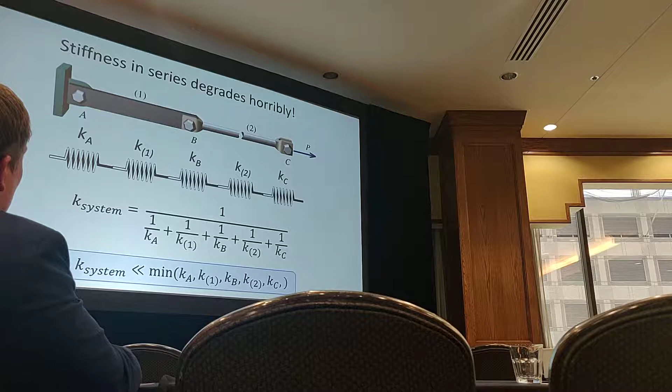You're not interested in two-bar linkages per se, but extrapolate that in your mind to a structural system. The easiest way to present it is with this little system. On the left, we've got a connection, a bar, a connection, a bar, and a connection. We're interested in knowing the total stiffness of that system, which could be represented as 5 springs in series. If you did the math, that's what you would calculate. But my point isn't the math, it's to really think about structural systems when they're in series, and realize that the system stiffness is actually smaller, a lot smaller, than the smallest of one of those individual stiffnesses. It really hurts when you put things in series.

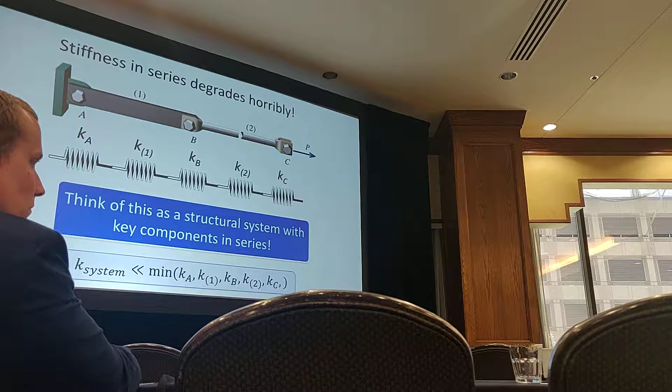Sometimes engineers will have a bracing setup that's all in series, and they've got a problem they can't fix, so they call me up and ask what did you do. Well, we had it all in series. What did you do next? We added one more member in series, but this was a really stiff member, and it even made the problem worse. So here's a situation where you add material and you're going in the wrong direction. As long as you're putting more and more in series, you're making the problem worse and worse.

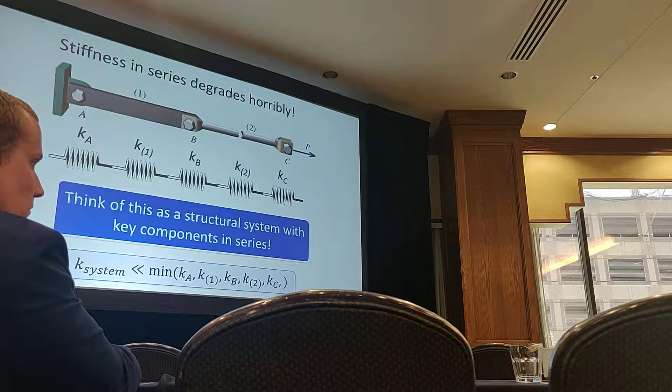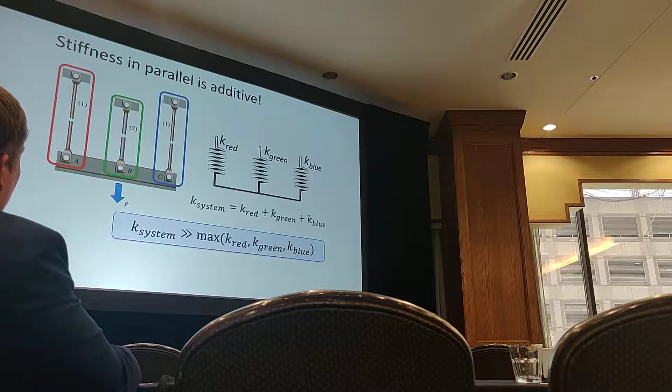Now the counter to that is when things are in parallel. This is a much better universe to live in. As a structural engineer, always ask yourself, especially in stability problems, am I helping the problem? Do I have my setup in parallel? Here are 3 springs now in parallel, 3 bars. Life is a lot better. In fact, the stiffness of this system is larger than the largest of any one of those, a lot larger. Anytime you add another component, you're adding more stiffness, so you're making the problem even better.

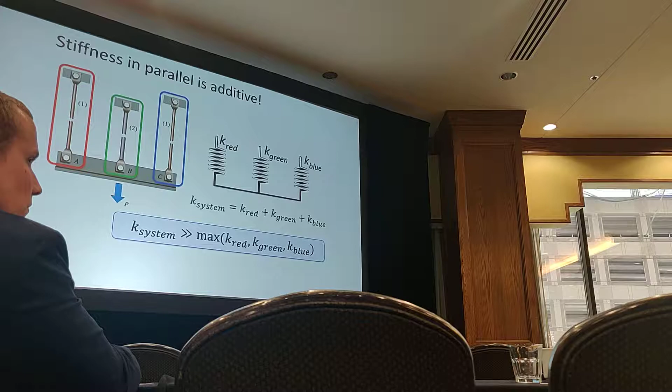So really focus on, do I have a problem here? And are they in series? And is there any way to switch from series to parallel?

The force always has a load path. When things are in series, if one of those springs is a piece of wet spaghetti, you've lost the stiffness of the entire system. But if you have things in parallel, if one goes soft, a connection starts to yield, there's an alternative load path, forces can redistribute. That's a really good thing to have on your side. So that's my first point.

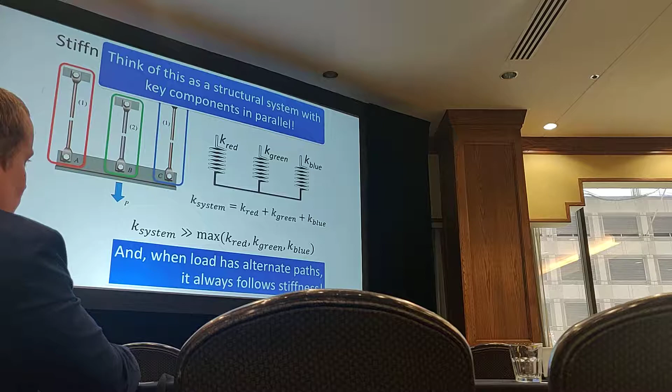The second is sort of the basis of every structural analysis. What you've got is equilibrium. So structural engineers, you're all cool with that, the forces and the moments, you've done that a million times.

The sister to that, which doesn't get a lot of attention, are compatibility equations. These are sort of the equivalent of equilibrium, but in terms of displacements and rotation. So if you have a column and a beam connected to it, if that beam rotates and it's a rigid connection, so does the column. These things all have to make sense.

Now, fortunately, between the two of those, we have enough equations to solve any problem. Unfortunately, some of the equations are in forces and moments, and the others are in displacements and rotations. So we have apples and oranges, and what allows you to move all to one side or the other are your constitutive equations, your Hooke's law and all of that.

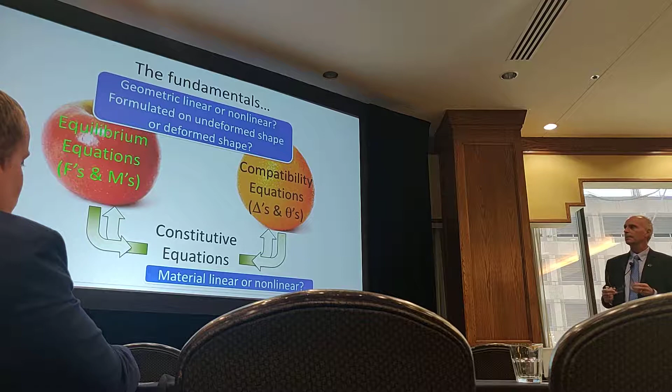So why do I bring that up? Well, a lot of you are using structural analysis software that can do a geometric nonlinear second order P-delta analysis. The only way it does that is by modifying either your equilibrium or your compatibility equations. If they're being formulated, equilibrium and compatibility on the undeformed shape, you are not accounting for second order effects. If they're accounted for on the deformed shape, you are.

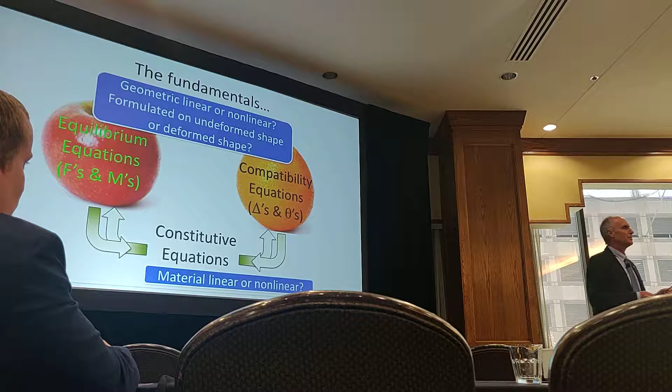This bottom part is if you go even further and do a material nonlinear analysis, accounting for yield and so forth. That can only be done through constitutive relationships. This is just a wake-up call on the fundamentals that often get missed - how does the program account for this? This is how it's doing it.

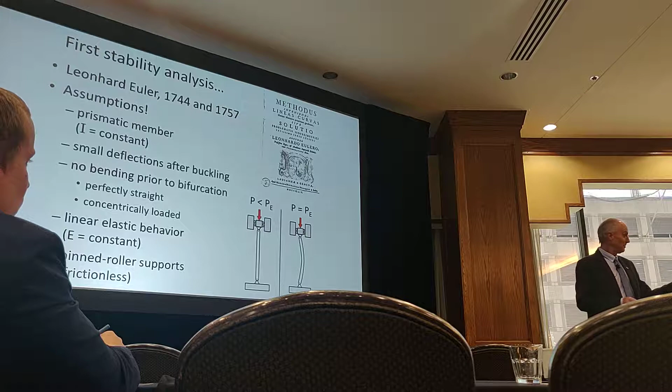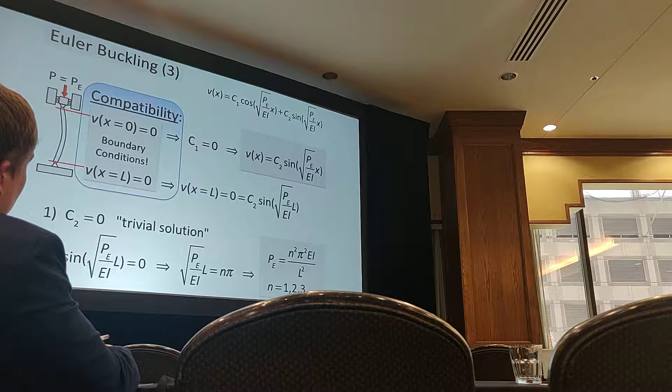Going back to the oldest stability analysis in the mid-1700s, Euler looked at this. I just want to show you his math: he started with equilibrium on the deformed shape, already doing second order analysis. He had a buckled shape, did equilibrium, and applied a moment-curvature relationship, which is a constitutive relationship. This provided a differential equation that's been solved many times. To actually get down to the familiar result, pi-squared EI over L-squared, he needed one more step: applying compatibility and looking at boundary conditions. So even the oldest stability analysis uses equilibrium, compatibility, and a constitutive relationship - those are your tools.

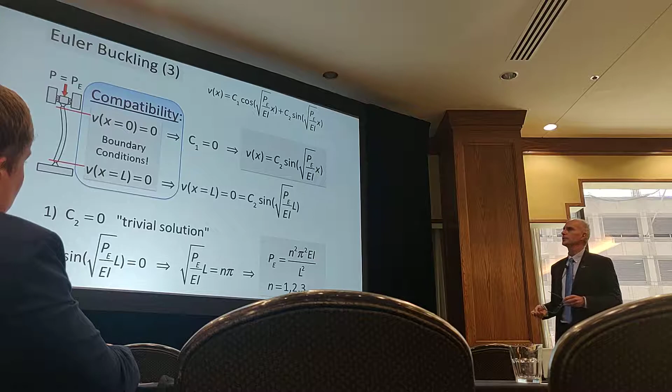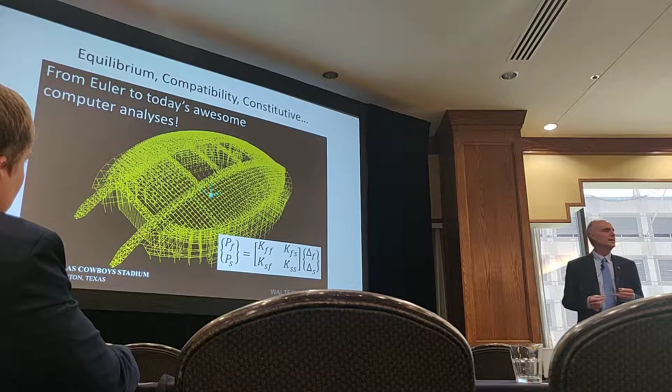If you look at today's structural analysis software - here's a SAP2000 model of the Dallas Cowboys Stadium, done by Walter P. Moore - underneath that software you'd find a lot of computer code and linear algebra. But keep digging and you will find equilibrium, compatibility, and that constitutive relationship. It all comes down to those basics.

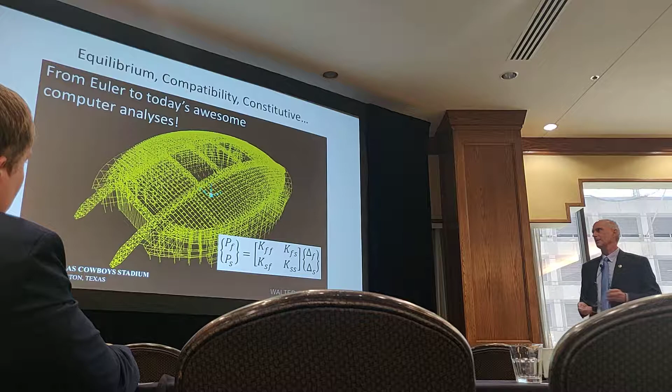Superposition is always so tempting, but keep in mind, in order to superimpose effects, the system has to be behaving in a linear fashion. Many times with respect to serviceability you do have that condition, so you can apply superposition. But many times when looking at ultimate strength, limit states design, and instability problems, you can't use superposition. So have that in mind.

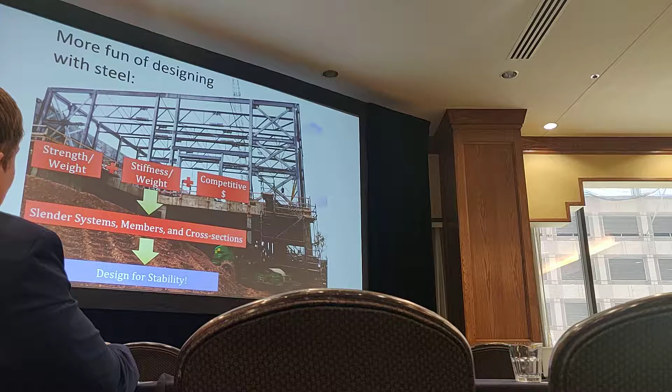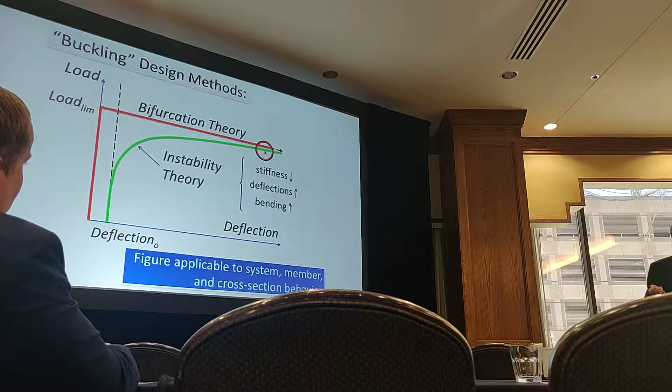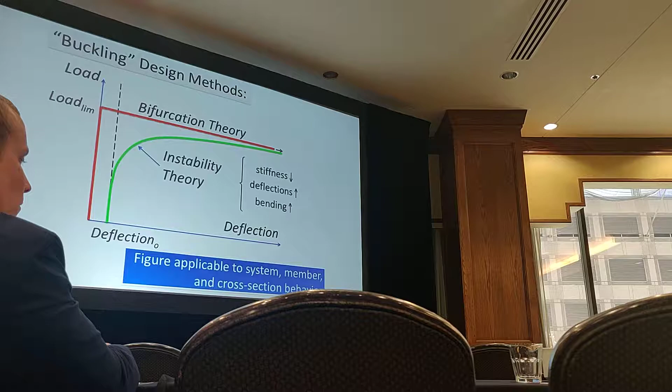This is pretty much what all of us came through whenever you were educated, 60s, 70s, 80s, into the 90s. That was something was perfectly straight, nothing happened, and then suddenly, wham, it buckled. Those are the differential equations you solved in life. But when we transitioned more recently in a design method, we had to assume something was not perfectly straight. There was a small amount of imperfection, and as you loaded, that imperfection started to grow, and eventually you would reach an instability. So two different schools, and it's the instability theory one that people are still wrestling with today. So let's give that a try.

So here's a couple of different possibilities. Here's a compression member. Let's say, over on the right, we're testing this at Lehigh University, a big long structural steel column. We're squishing it, and we would have two schools. Now I've taken the structural member and rotated it on its side, but if on the horizontal axis we were monitoring lateral deflection of the column, on the vertical axis the applied load, bifurcation would tell us we come all the way up, we hit Euler buckling, elastic flexural buckling, and off we go.

On the other hand, if we had some type of initial imperfection, we would load this thing up, and if we didn't get any yielding, it would sort of track the green curve, where that initial imperfection would start to grow. When it grew, the moments would grow. The moments grow bigger, more force, bigger moments, bigger deflection, and eventually we'll buckle the column. Of course, in reality, those moments grow, and between the combination of axial force, flexion, and a little bit of residual stress, we actually get inelastic flexural buckling. So it happens with a column.

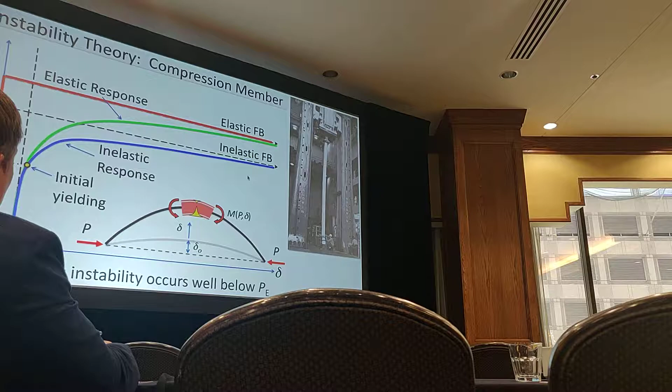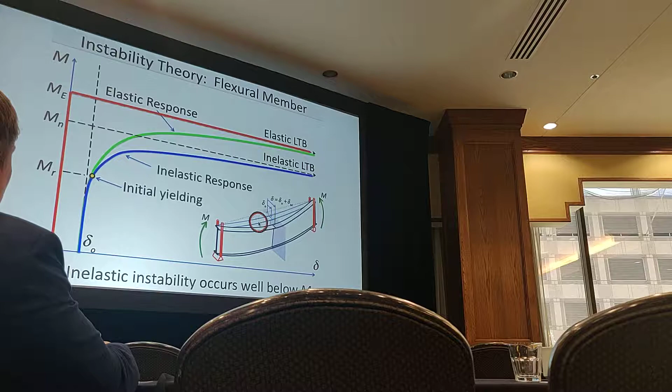Here's a flexural member being subject to uniform bending. What we're going to monitor here, it's unbraced for quite some distance. We're going to look at lateral torsional buckling. So here's this point here, and as we apply these moments, if the member is perfectly straight, moment, and then suddenly we've got elastic LTB.

If the member has any small, and they're real, initial imperfection out of plane, we get minor axis bending, not much, more moment, not much, and then suddenly out of plane, the moments start to grow. As we apply more major axis moment, we get more minor axis moment, more twist, some yielding, and eventually we get either elastic or inelastic lateral torsional buckling. Again, two schools, the bifurcation school and the instability school.

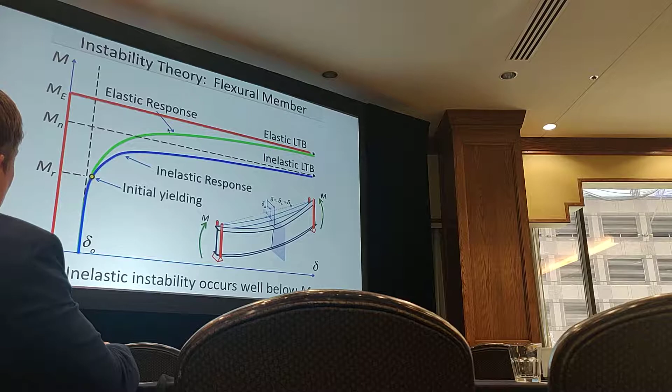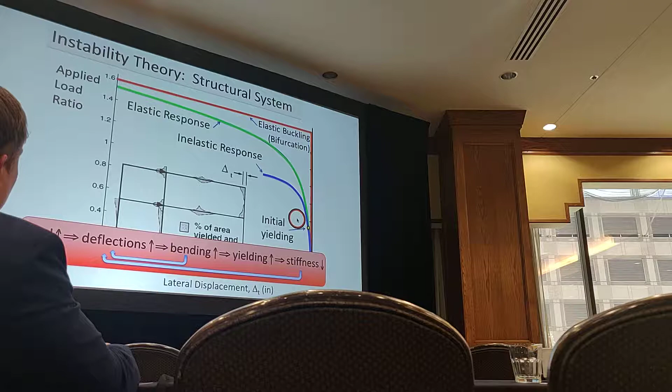This goes all the way to structural systems. So if we have a structural system like this one here, we put some load on it, we could say nothing happens, and suddenly the system buckles. But in reality, even if we don't have an initial imperfection, even if the system is non-symmetric, it will start to lean. And the second it starts to lean, we'll get some deflection laterally, we may pick up some yielding, and eventually we'll reach an inelastic limit point.

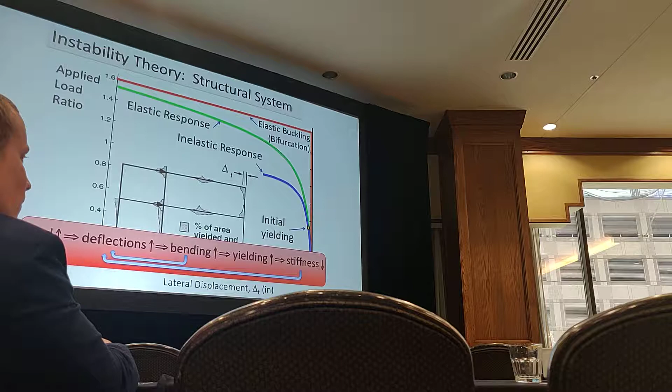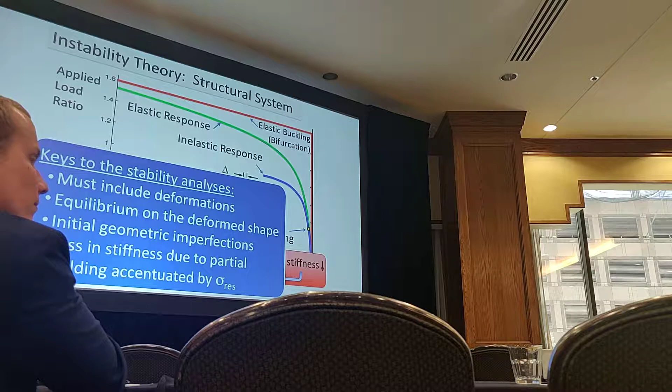So more axial force, more bending moment, more deflections, yielding, the whole system is coming apart. Two schools. Now the key to the second school, in understanding these green and blue curves, is the stability analysis you have to do. It's got to include deformation, so you have to be doing equilibrium on the deformed shape. Critical, you have to have some type of disturbance. If the system is perfectly symmetric, you need to include some initial geometric imperfection. And there's going to be a loss, most likely due to yielding, that could be accentuated by the presence of residual stresses. So these things are hurting you.

Now, if you also go back into 1980, Jerry Iffland and Charles Birnstiel wrote a nice AISC report, and they went through and looked at all the different possibilities on what may cause a frame instability. And it was really between our knowledge, the group of us on TC10 and AISC, and Iffland and Birnstiel's report that we wrote in 2005, the chapter C as you see it today, especially that front matter.

So right up at the beginning, there's what I would call AISC's Big Five. And what are they? Your stability analysis must consider all pertinent deformations, equilibrium on the deformed shape, initial geometric imperfections, loss in stiffness due to yielding, and variation. And variation would be how you're capturing this with an omega or a phi factor. So again, just some background on how we got to those Big Five.

And that's why they're so important to a stability analysis. All right, so much for the fundamentals. Let's keep rocking here. Judgment.

I'm preaching to the choir here. You are structural engineers, and nobody knows more about judgment. But the one thing I'd like to say as an academic is please continue to embrace every opportunity. What makes you a structural engineer is that you are employing judgment. Don't let computer software overtake you. Let it inform your judgment, but you are in the end. So embrace it. It's going to be constantly developed and constantly questioned.

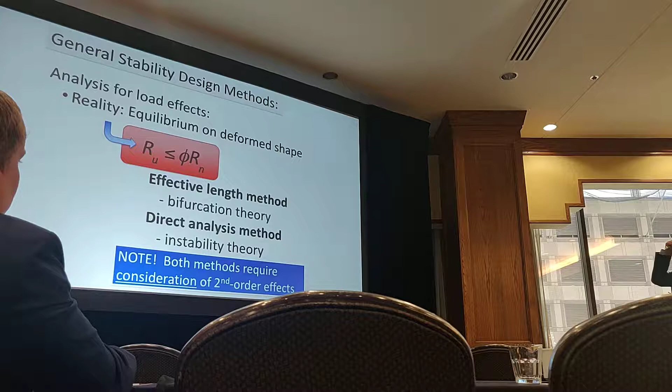Very important: both the effective length method and the direct analysis method are based on ultimate strength design, which means you need to account for second order effects. So a lot of structural engineers, when we introduced the direct analysis method, said, I'm sticking with effective length because I don't need to do a second order analysis. Not true.

That's right, true nerds. So put it on your laptop, or give it maybe for an anniversary gift.

Equilibrium on the deformed shape.

All right, quick discussion on the effective length method. The key here is we are using one factor, a K factor, one effective length factor per member, to account for all of those big five. It's quite a chore for one coefficient to do. All right, it works well. It's been around for 55 years. In fact, the Higgins Award that I received, Ted Higgins was the one that introduced it to AISC in the early 1960s.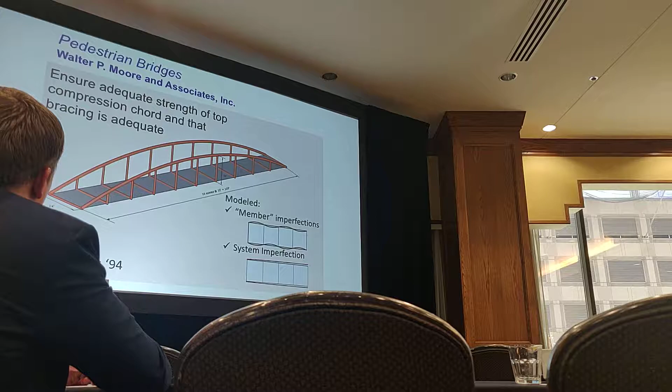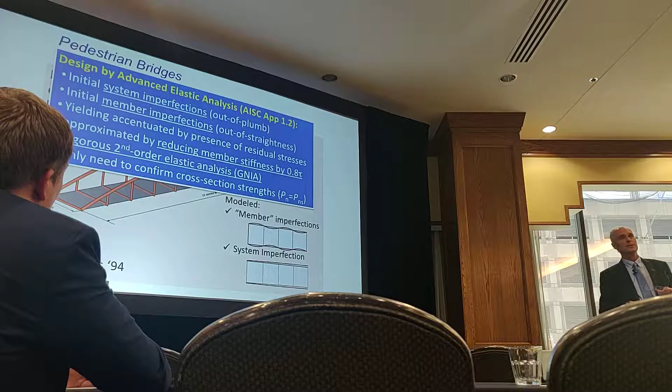So they modeled both the member imperfections—in between each one of the panel points, they put a little out of straightness of the arch—and then they took the entire arch and modeled it as a system imperfection, sort of leaning out of plane. Once they did that, they ran a very rigorous second-order analysis, using their 0.8 tau. When they went to actually check the capacity of the arch, they just needed to use the cross-section strength of the arch; they didn't have to go to the interaction equation or anything like that. So they really were fortunate there.

So the alternative to both of these elastic methods is there are much more sophisticated methods available to you. Again, one more version of the direct analysis method, but here you go all in—you actually model the material nonlinear behavior. So you're doing your second order, you're modeling your system, but you're actually accounting for the yielding and the residual stresses.

Even though this sounds like rocket science, and it is relatively new to the specification, many of you learned this as plastic design. So this is just plastic design on steroids. It's a bit more than plastic design, but the real nice thing is it allows you to not have to use the specification equations—all of that is being accounted for in the analysis. So you've got a nice option there to just go beyond first yielding and actually get an actual limit state for that structure.

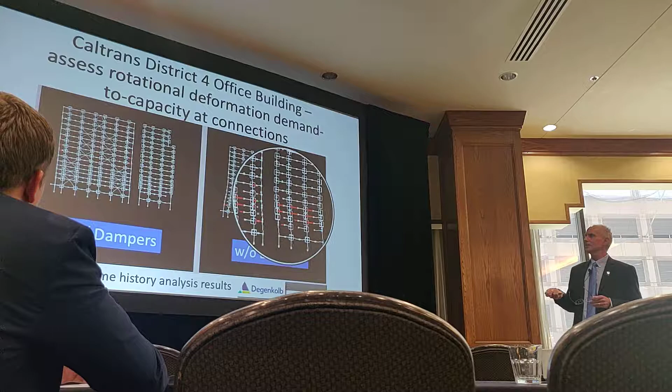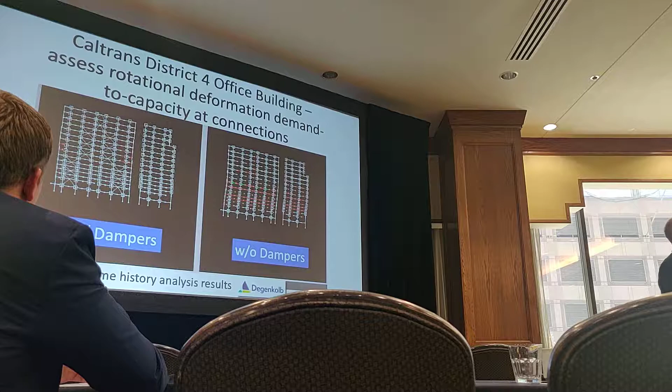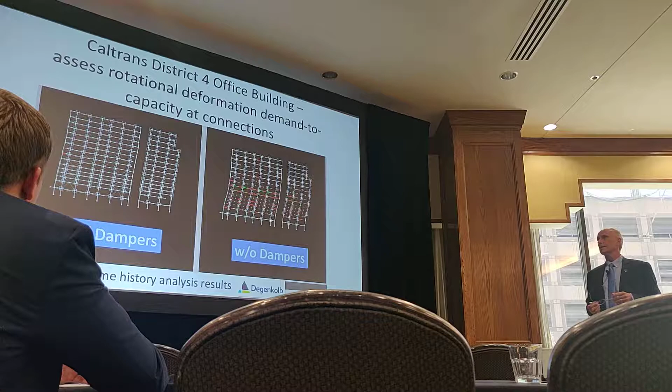And we've got a front view of the building and a side view of the building, depending on which earthquake. On the left side, really not too much red going on. Those viscous dampers are really working hard and doing a good job of protecting the steel. So exciting times ahead, and these types of analysis are more and more heavily being used, especially on the West Coast.

Now, all of this is available to you in a design guide by AISC. So I would really encourage you, if you haven't yet, go in there and grab the design guide. Lots of examples provided and a good overview, a full enchilada of this direct analysis method. It's been available now for 15 years, and it really is a nice alternative to that effective length method.

So to wrap up, I often get asked about this. I've spent my career trying to advance more and more higher levels of analysis in design, especially design in metal structures.

I've often been asked, can you give us some thoughts on what you think the future holds? I don't have a crystal ball, but here are some thoughts.

As far as component and connection modeling, viscous damping modeling, we know how to do that, and our computer software can do that.

I think where you're going to see more rapid change is actually in the applied loads. They're going to be earth, wind, and fire. Earth seismic, as I showed before, but also tsunami, avalanche—all of these things nonlinear. You put the load on and run your analysis. Now the load is actually going to be dynamic.

Wind—we go up and do wind tunnel tests. We have all the wind data, the distribution, time history on what pressures were on the side of that building. Take that envelope and run it in your structural analysis.

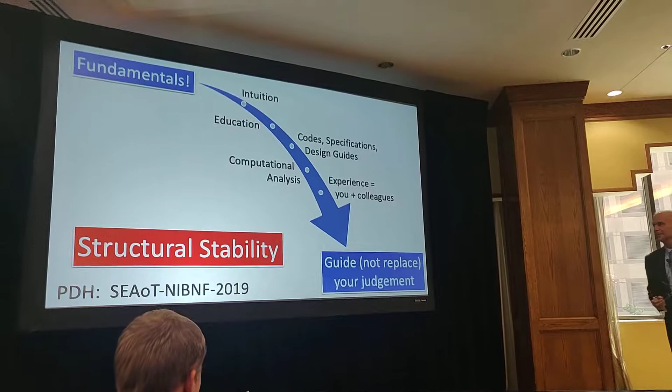Look at deformed shapes every once in a while. Computer analysis—I'm a computer guy, I write software—but I'm telling you, don't let it control you. Let it inform you, right?

So that's important. And of course, you and your colleagues' experiences are incredibly valuable. Have some conversations. Let all of these fundamentals guide your judgment, not replace it.